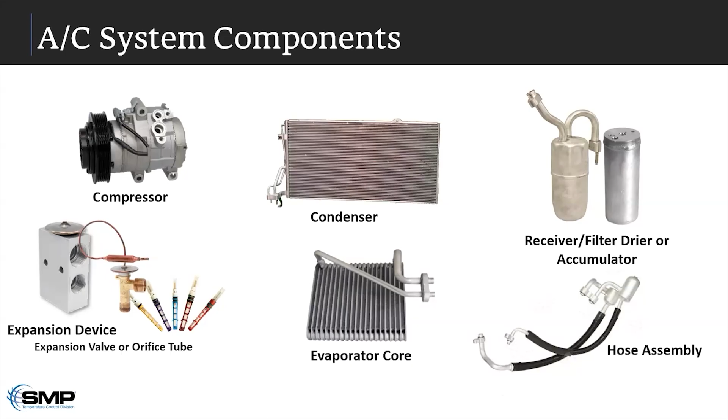All right, let's put all this together real quick here. We see what the major components are. If we're looking at a system with a TXV valve, remember I said we have one with a TXV and one with an orifice tube. They work very similar, and here's how that all plays out.

In the middle here on our modern systems, we've got the PCM or the computer, which is going to control the whole operation. It's going to command the compressor based on whatever input it's getting from the temperature sensor and how well the system is performing at that time. When it does that command, the compressor is now going to pressurize the refrigerant into a gas form, and it's going to force it through the condenser. The first place it goes is the condenser.

Then the condenser is going to do exactly as its name implies. It's going to condense. It's going to remove the heat from the system here. And then that's going to change it from a gas back to a liquid state. And that's then going to be forced through the receiver drier. Then that high pressure liquid refrigerant will go up to the expansion valve. That expansion valve being the TXV in this example here, that's going to regulate that pressure. At that point, it's going to meter it, drop the pressure. And so now we've got a low pressure amount of refrigerant going into the evaporator core.

And then the evaporator core, once again, is going to do as its name states, it's going to draw warm cabin air across it. It's going to cause that refrigerant to boil and evaporate. Then it's going to grab the heat and remove it from the evaporator core at that point and send it back to the compressor and do that cycle all over again. So again, very few components doing a whole lot of work to get a very simple task done, which is just remove heat so we can have a more comfortable cabin temperature.

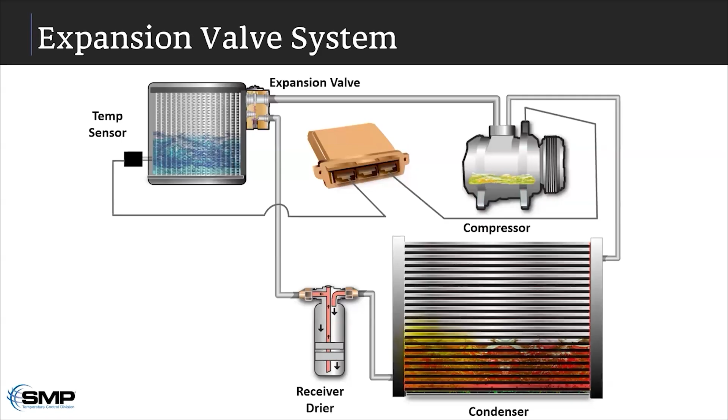Now, that's the expansion valve system. Again, it's the exact same on an orifice tube system. The only difference being the orifice tube versus the TXV valve. The orifice tube is another example of why we have to bring up hoses, because some orifice tubes cannot be replaced without replacing the hose. They are captured, actually inside of the hose assembly, and there's no way to replace them without destroying the hose assembly. So if you have to have an orifice tube, you have to have a hose. That's really the big difference between orifice tubes and TXV, is the way that they regulate and the fact that some cannot be replaced on their own. But the system runs the same here.

Again, the compressor is going to do its job. It's going to compress, build that gas, send it over to the condenser, get condensed, turn it back into a liquid, and then remove the heat from it, send it through that orifice tube to drop the pressure. And when we say drop the pressure with the orifice tube and TXV, you think about it kind of like putting your thumb over the end of a garden hose when it's running, right? You're restricting the path, you're changing the pressure. That's what the orifice tube and the TXV valve do.

And then they do the same job, right? Once it lowers that pressure, it deposits that into the evaporator core, where it's then again going to evaporate or boil. And it's going to remove the heat from the cabin, give us that nice cool temperature inside. And then it's going to send it back through the accumulator and back to the compressor and repeat that cycle all over again. So again, they work very similarly, and there's really only 5 or 6 components here doing the bulk of the work.

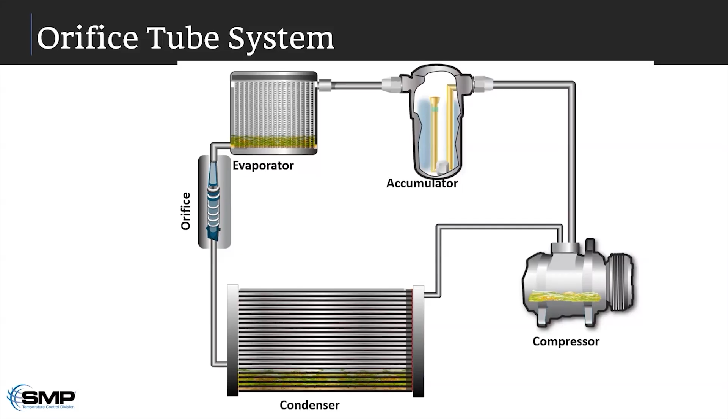In these cases now, almost all of it has to be replaced, but there's a lot of solutions for it now, which is a good thing, and that's what's going to help us. But one of the things we have to talk about when we talk about doing an AC job properly is the condenser.

Right now, there's really no case to be made for flushing any condenser out there. The reality is, when you think back to how the system works, whether it's TXV or orifice tube, the first thing in line after the compressor is the condenser. So any debris that makes its way into the compressor and back out is going to immediately go into the condenser. If we have a failure in the compressor itself, it's going to send debris through the condenser, and you just can't get that stuff out of there.

We've had conversations with technicians, and they're very adamant, saying, hey, we can flush these things. We'll put the flush in, the material comes back out like it's supposed to, so I must be flushing it, right? Well, yeah, you are flushing some of it, but you're only flushing the paths that it can get through. You're not opening up the paths that are restricted and have been restricted previously from debris and soot and things that have built up.

In many cases, after you do a flush, the bottom half of the condenser is actually still going to be completely plugged up. So we're not going to get full efficiency out of this condenser, and we're not going to be doing justice to our new AC compressor or our system after we put it all back together, because we're going to be basically starving it of removing heat, since the condenser is not as efficient as it should be.

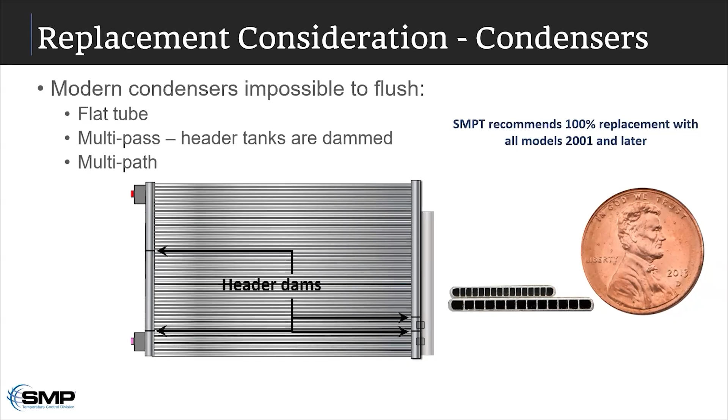So really, anything past 2000, 2001, we're going to always recommend a condenser be replaced along with an AC compressor. And luckily, we've got you covered on that, and you're very well covered when it comes to condensers. So we've got them ready for that on the AC selling season.

When it comes down to doing a good, successful, complete replacement on a compressor, there's really only a few things we have to make sure of. One is that every inch of the refrigerant path should be new or flushed. So if it can be flushed, like an evaporator core, it should be flushed. If it can't be flushed, like a condenser or one of those hoses with the mufflers, it needs to be replaced so that we have a clean system.

And then we also need to make sure we charge it with the exact amount of refrigerant, so we've got to have the right tools for the job to make sure we put in only the exact amount it should be. And we've got to make sure we use the correct type, viscosity, and amount of oil, which luckily with the kits we're talking about here in just a second, if you have the kit, you don't have to worry about getting the correct type because it's already going to be in the box. That's another big thing we have to consider when we do a compressor replacement, whether it's going to be successful or not, is if we get the right oil in there.

And then we also still have to make sure we have proper airflow. So even if we do replace the condenser, if we have a restriction, say the fan's not working, or the fan clutch is not working, or an active grille shutter or something like that is not working properly, we're still going to be starving that new AC system. So we have to make sure we have proper airflow as well. So that's our keys there.

So let's again talk about more. What do we have available? What are we going to be offering our customers this year during this AC selling season? We know what we need, we know what the components are, we know how they work. How are we going to stack up?

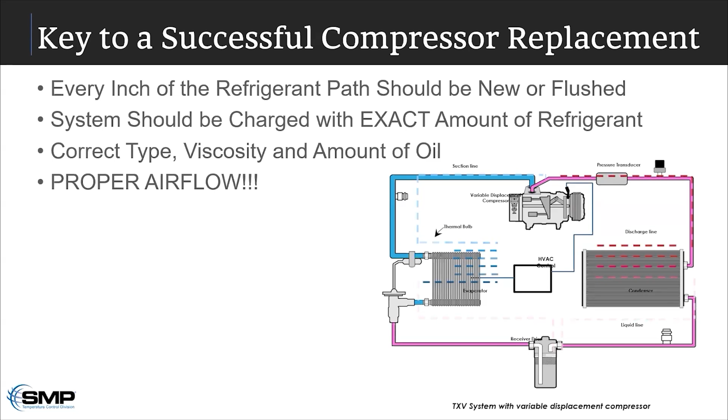We know we got the condensers taken care of. Well, we've got the kits taken care of as well, and these are going to be huge. They already have been huge, and you're going to be getting a lot of calls on them.

Again, we've been talking about kits for a long time now, starting all the way back in 2005, when it was really more of a virtual kit inventory analysis kind of thing, where there wasn't a whole lot to offer as far as on the shelf, ready to rock, put it on the car, let's go.

It wouldn't really have worked the way the program was built at the time. It was really just analysis—can we do this? Then in 2007, we actually had retailers start offering the kits in a virtual way, where you would basically basket it all on the website, and you'd end up usually getting a discount when you basket it all, plus it gave you a better warranty. And so the virtual kit was born.

Then we started seeing that trend just boom really big. So in 2015, we started doing prepackaged kits for the customers, and everybody loved those. We had 50 part numbers, couldn't hardly keep them on the shelves, and there were certain part numbers that went on back order. Everybody loved the fact that everything they needed was in a box minus the condenser—the AC compressor, the accumulator, the orifice tube or TXV, whichever system it had, all the seals, the oil, everything was ready to rock. And so everybody loved those.

From 2015 to 2019, that kit offering went from over 50 part numbers to over 300 part numbers, and that's a very short period of time to start building that many kits. The problem with the kits is that, as great as they are, they take up a lot of shelf space and can cause some redundancy in inventory. You may have a kit with compressor part number 1-2-3 on the shelf, and then 10 feet down, the same compressor that comes in that kit by itself in a box, causing that redundancy. So we didn't want that for you. For the ones where you don't have redundancy, we have the full kits now.

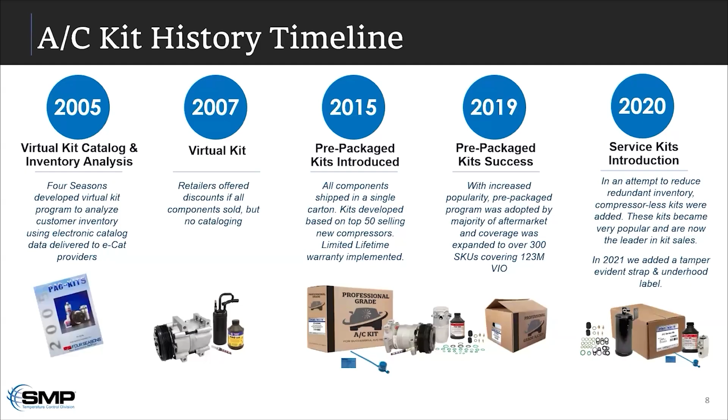So now you have a reman and a new compressor, and now you have this service kit that has everything else in it that would have come in the full kit. Your customer can pair it with either the new or reman compressor—they can do either one. So they're going to get their warranty, they're going to get the compressor they want, and they're going to get the full service kit. We have them covered this selling season, we're ready to go with them. Pretty much anything that comes through their door, we're going to have them covered in some way.

With those new service kits—just a kit, no compressor in there—we have over 530 part numbers now, which is going to cover over 221 million vehicles in operation on the road. So we are ready for them with the kits. And now those complete AC kits that have everything in there, everything you need plus the compressor, over 930 kits. So whether they want to pair a service kit with a reman or new, we've got them covered, or they just want the full kit, we have a part number for that as well.

The nice thing about the AC kits, not just for us and for you but for the shop, is they get the guaranteed related sales on all those components that they otherwise maybe wouldn't have gotten if they didn't do the kit, because the kit makes sure we replace everything. Whereas if we just nickel and dime it and do the compressor here or the accumulator there, it's going to end up costing more, and we don't get all those extra components that should be replaced. So it's a really good way to make sure those components are replaced and we get those sales. It also reduces warranties drastically—when everything's replaced, there's really no chance we have a comeback unless something was done wrong. It's a really great warranty reduction tool using the kits as well.

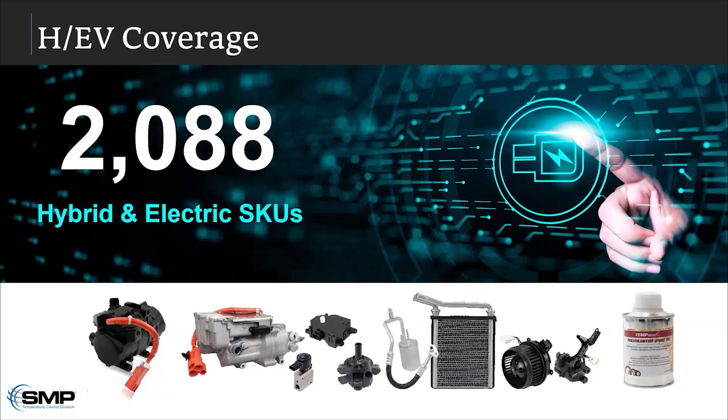When it comes to compressors, 22 SKUs already covering 5 million vehicles in operation. 13 of those are new, 9 are reman, and we've got another 10 headed this way really soon here in 2025 to add yet another 2.7 million vehicles in operation. And that's a pretty big deal.

If we find a shop that's working on hybrid and electric vehicles, oftentimes when it comes to AC components, about 99% of what they're getting is from the dealership, because there's just not a lot of good, quality aftermarket out there. Well, you have that now with this program.

Now, I said we'd talk about hoses a little bit more. We're ready on all the kits, we're ready on hybrid electric vehicle, we're ready on condensers, and we're ready on hoses as well. We're a basic manufacturer of these hoses, and that means we can provide quality because we're experienced in engineering, precision machining, and custom tooling. We're building it from the ground up, doing this all ourselves.

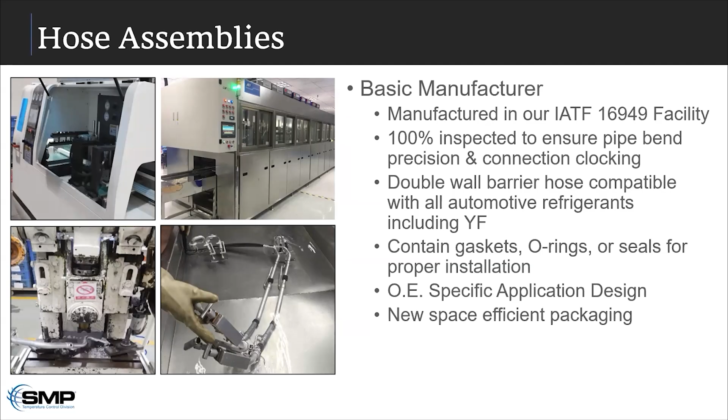So again, on hoses, we've got them covered, and we actually have a lot of hoses at this point, over 3,000 part numbers.

The reason we have so many is because we noticed a few years back, around 2020, that we were a little further behind some of the competition when it came to availability and coverage for our customers. What we don't want is for your customer to have to call another supplier for a hose or an orifice tube when they can get everything else from you through our program. We want them to have a one-stop shop, and we were falling behind on that with hoses.

Well, we fixed that real fast and in a hurry. You can see from 2020 to 2024 we added over 1,200 SKUs. And by the end of Q2 this year, we'll be at 3,300 SKUs in our hose line.

At this point, it doesn't matter what comes through the shop, we're probably going to have the hose for it. Those 3,300 hoses we'll have by the end of Q2 are going to give us over 94% coverage, including light cars, light truck, heavy duty, hybrid, everything. It's going to give you the opportunity to get the complete sell, the complete job on all these AC compressor replacements coming up. So don't forget, we've got you covered on hoses too.

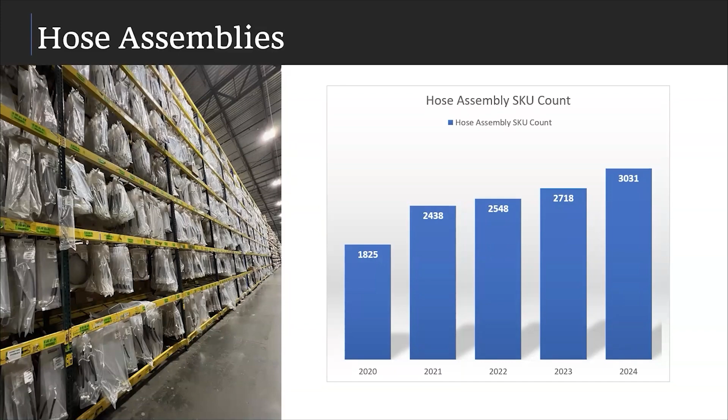So it's not just condensers, it's not just hoses, it's not just service kits. We're trying to make sure everything they could possibly need, you can give to them when it comes to AC selling season this year. And that includes some of the assortment kits, so don't forget about those.

We still have the original, the 24-813, just a nice little service parts kit. It's got the caps, the O-rings, the seals. Then there's an update to that, the 24-818, which is basically the same kit but with YF components included, so we have some capability to deal with 1234 YF and 134A.

Then we have a YF supplement tray, 24-819, with more components for customers getting a lot more vehicles with YF systems. And we even have a 24-815 box, a heavy duty service parts kit. So we have them covered from the time they tear it down to the time they put it all back together, including a YF assortment pack, part number 24-800, which has all the components necessary for YF AC service jobs.

What's also cool is if you look at those boxes, they're all interchangeable and stackable. They're basically the same box, so customers don't have to keep up with a bunch of different styles of organization.

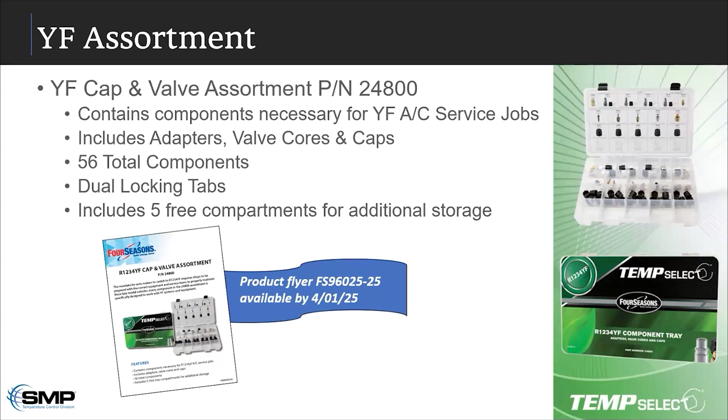What you see on screen there with that flyer for the YF valve assortment, that's a flyer you can pull down from 4s.com, or get with your rep and they can get you some printed copies. So we have them ready when it comes to everything from the parts to the sealing, even the tools they might need to get the job done right.

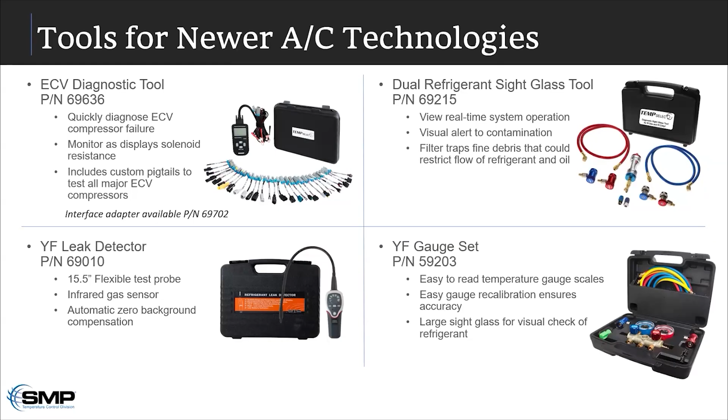So we've got them covered for tooling as well, even oil. Obviously if they get the kit, they're going to get the right oil in that kit, which makes their life a lot easier. But even if they're not doing a kit, just servicing an AC system and need oil, all the oils are available through the program too, and they're the correct oils, not just a bunch of universal stuff.

It's actually the correct oil, and that really does make a difference. It's important when it comes to a vehicle that's hybrid or electric, or YF versus 134A. So we have the right oils for the job there as well.

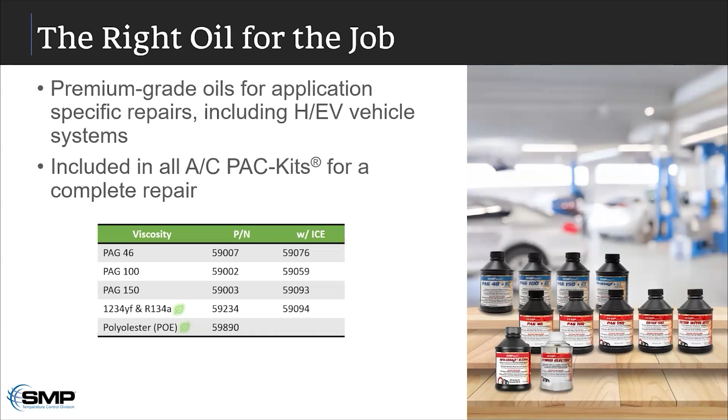It's great this year. It's going to be even better next year when we get the new DC move done. That's going to give us close to 600,000 square feet of distribution space to get more out quicker to you all, especially on the West Coast. And it's going to break down a lot of the 2-day waits, to where we take those 2-day waits out of the equation.

So we're ready for this season, and we'll be even more ready for next season. So don't worry about whether or not you're going to be able to get it. We'll get it to you.

The last thing I want to bring up before we wrap up here, we can't not talk about air door actuators when it comes to AC selling season, because even if we do everything right, we sell the kit, we do the job right, if we can't get the air through the vents, it's really not going to help us, right? So air door actuators are another big category, and they're actually second only to compressors in volume sales when it comes to the AC category, because of how many there are and the fact that a lot of people just opt to replace all of them when they have to pay to get the dash pulled out in the first place. So you've got some European models here that even have 7 different actuators, so there's a good opportunity to get 7 sales versus 1 whenever we have an actuator call come in.

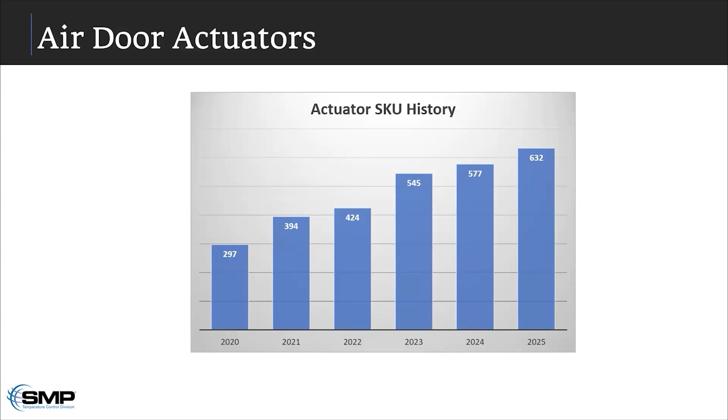And again, when it comes to all of the different components that you could possibly need, we are ramping up on every single category, including even air door actuators, where we have over 600 available to you now, another 100 planned for this year.

But that 242 million vehicles in operation, that's a big deal. That means 242 million vehicles on the road today we have at least one blend door for. But you have to think most of those have at least 3 to 4, so that's 242 million opportunities times 3 or 4, which is really, really kind of awesome. And that's one of the reasons we have the kits for these available now as well, because again, we know a lot of customers are just doing all of them when they have to pull the dash out, and it's just increasing those opportunities for us over and over and over here.

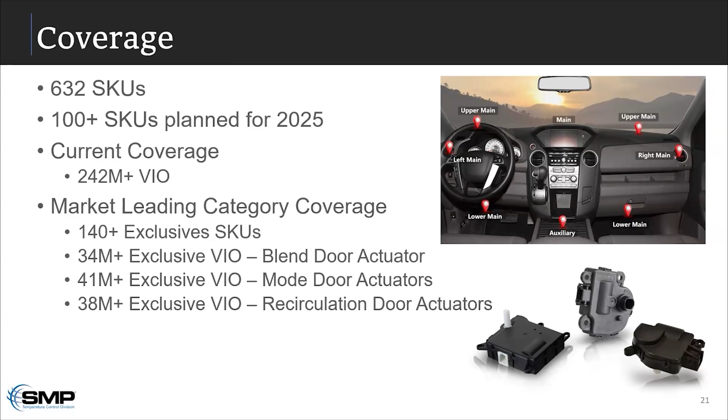And again, the last thing I'll say here is sales support. Make sure you're utilizing that 4s.com site for all this material, and also talk with your rep that's out there, and make sure you're asking for printed materials if they have it available to you, because it's really good information for the shops. There's a lot of folks that go out there and flyer drop, and I don't think we do that—I think we actually put stuff on a flyer there for people to see that makes sense, that gives them some type of value. So if you have an opportunity to print these out or get your standard rep to print some out for you, please do so. I think the shops will appreciate it very much.